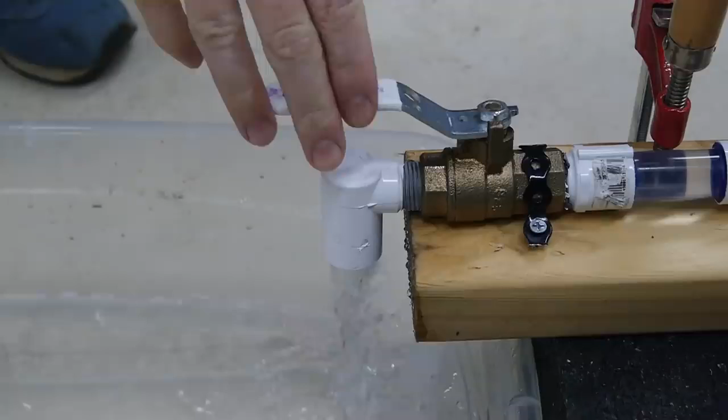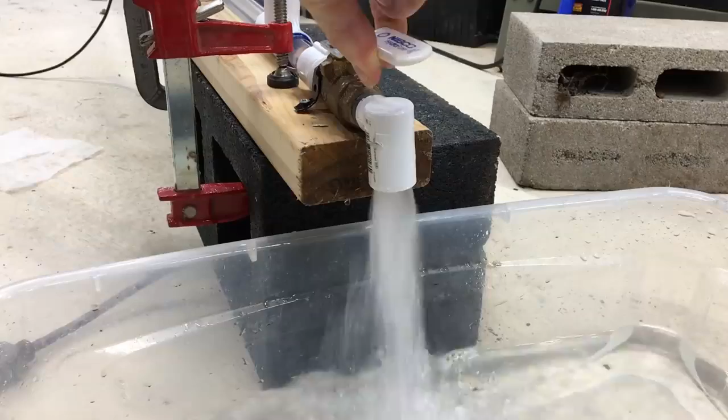It's easy to forget how heavy water is since we hardly ever carry more than a few ounces at a time. But if you add up all the water in the pipelines of your city, or even just the pipes in your house, it makes up quite a bit of mass. And when all that water is moving through a pipe, it has quite a bit of momentum. If you suddenly stop that movement, for example by quickly closing a valve, all that momentum has nowhere to go.

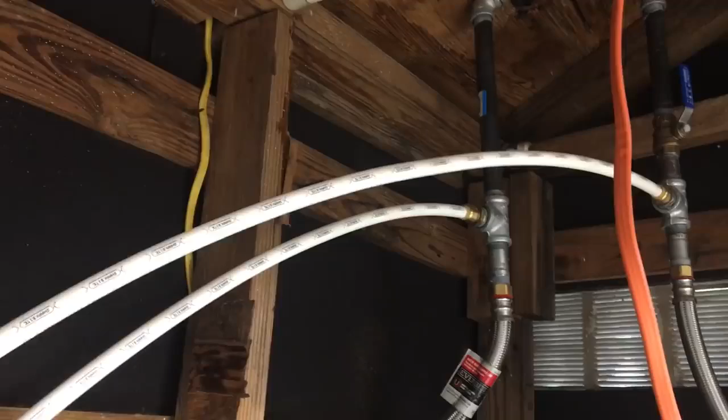Since water isn't compressible or springy, it can't soften the blow. You might as well be slamming concrete into the back of the valve and the walls of your pipe. Instead of being absorbed, that sudden change in momentum creates a spike in pressure that travels as a shockwave through the pipe. Sometimes you'll even hear this shockwave as banging in your walls when you close a faucet or run the washing machine, hence the superhero-esque nickname, water hammer.

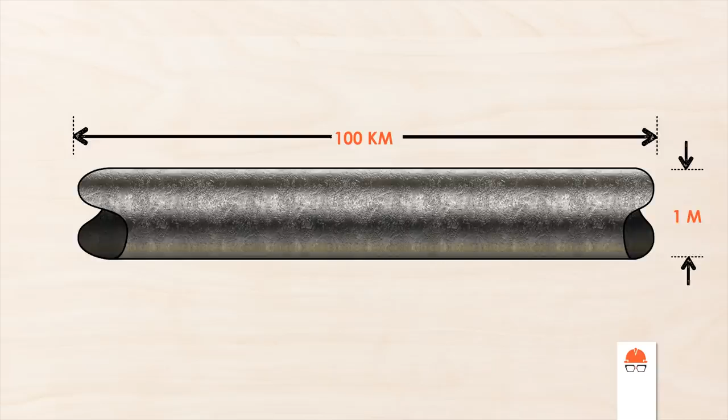Banging pipes inside your walls can sound a bit spooky, but for large diameter pipelines that can be hundreds of kilometers long, that surge in pressure from a change in momentum can cause major damage. Let's do a quick calculation. If you have a pipeline carrying water that is 1 meter in diameter and runs for 100 kilometers, a fairly average sized pipeline, the mass of water in the pipe is about 80 million kilograms. That's a lot of kilograms. In fact, it's the equivalent of about 10 freight trains.

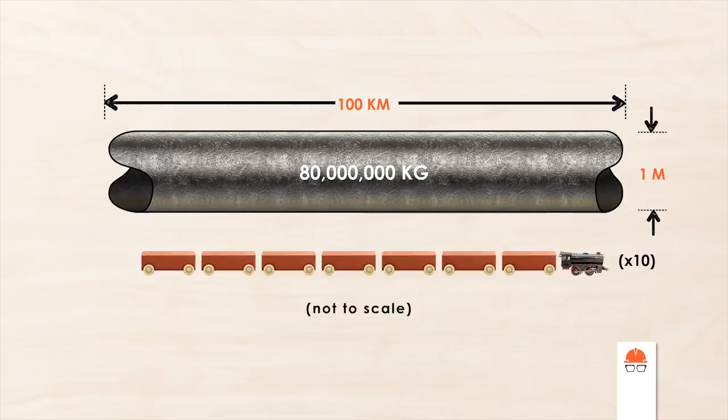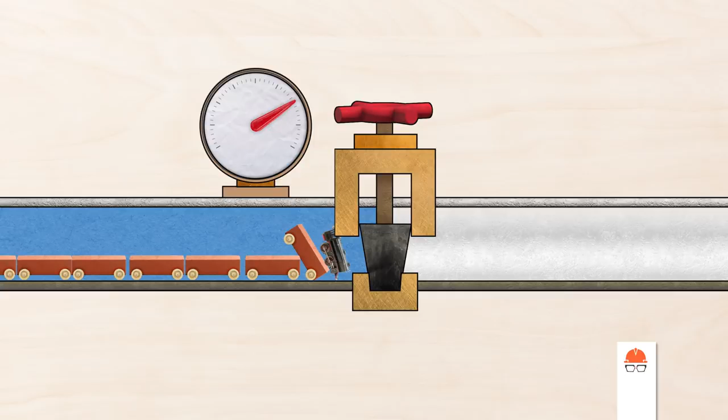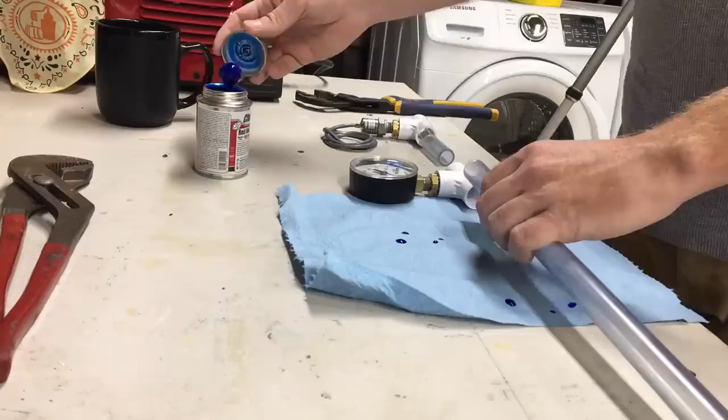Imagine you're an operator at the end of this pipeline in charge of closing a valve. If you close it quickly, you've essentially slammed those trains into a brick wall, and the pressure spike that results from such a sudden change in momentum can rupture the pipe or cause serious damage to other parts of the system. There's actually another term for when a large spike in pressure ruptures a sealed container, a bomb. And water hammer can be equally as dangerous. So how do engineers design pipe systems to avoid this condition? Let's build a model pipeline and find out.

Here's my setup. I've got about 100 feet or 30 meters of PVC pipe connected to the water on one end and a valve on the other. I also have an analog and digital gauge so we can see how the pressure changes, and a clear section of pipe in case anything exciting happens in there. I mean civil engineering exciting, not like actual exciting.

Watch what happens when I close this valve. It doesn't look like much from the outside, but look at the data from the pressure gauge. The pressure spikes to over 2,000 kilopascals, or about 300 psi. That's 5 times the static water pressure. It's not enough to break the pipe, but way more than enough to break this pressure gauge.

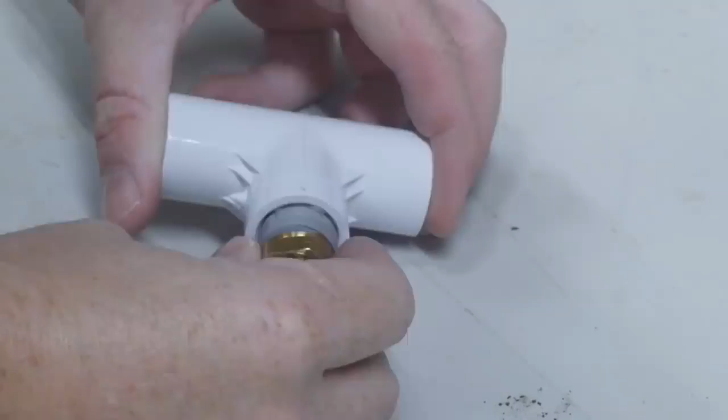We're not going to do any calculus here, but the terms of this equation show the parameters that can be adjusted to dial back these damaging forces. And the first one is obvious. It's the speed at which the fluid is moving through the pipe. Reducing this is one of the simplest ways to reduce the effect of water hammer.

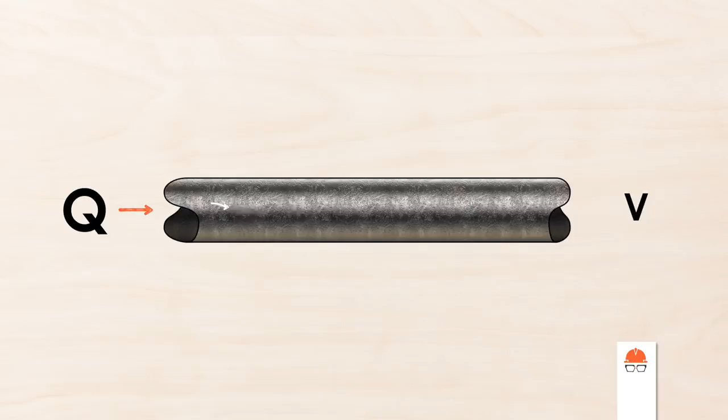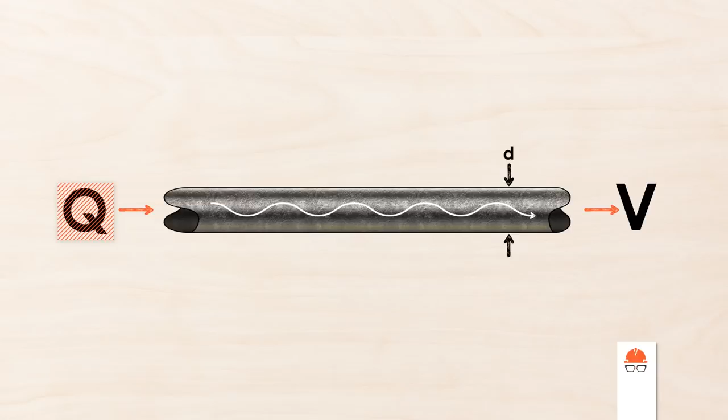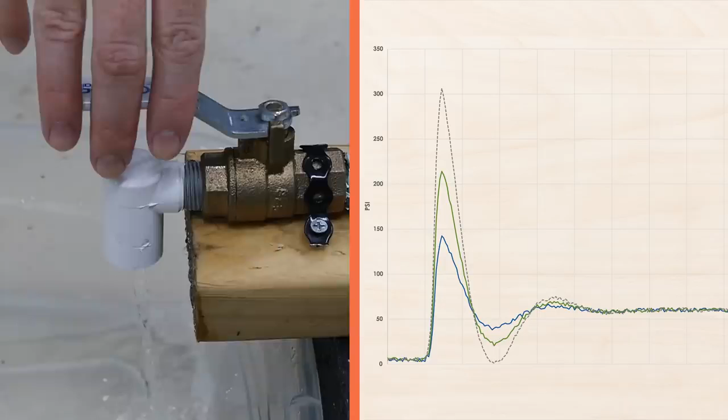Velocity is a function of the flow rate and the size of the pipe. If you're designing a pipeline, the flow rate might be fixed so you can increase the size of your pipe to reduce the velocity. A smaller pipe may be less expensive, but the flow velocity will be higher, which may cause issues with water hammer. In this case, my pipe size is fixed, but I can reduce the flow rate to limit the velocity. Each time I reduce the velocity and close the valve, the resulting spike in pressure decreases.

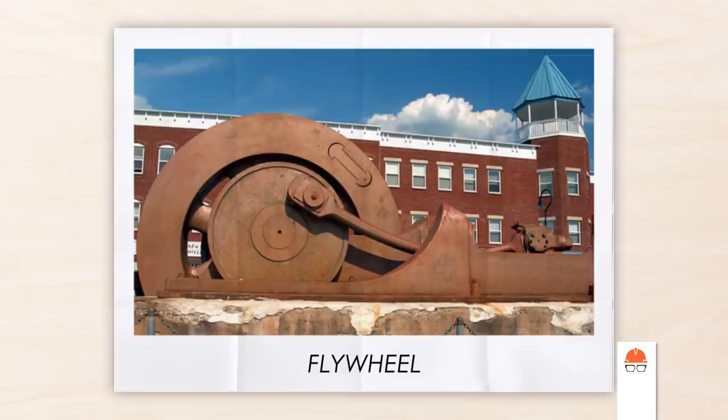Next, you can increase the time over which the change in momentum occurs. One common example of this is adding flywheels to pumps so they spin down more slowly rather than stopping suddenly. Another example is just to close valves more slowly. If I gently shut the valve rather than allowing it to snap shut, the pressure changes are more subtle.

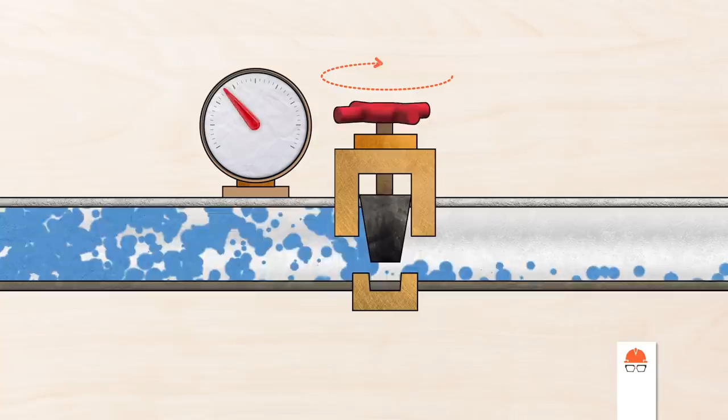On large pipelines, engineers not only design the components, but develop the requirements for operation of the equipment. This will almost always include rules for how quickly valves can be opened or closed to avoid issues with water hammer.

The final parameter we can adjust is the speed of sound through the fluid, also known as wave celerity. This describes how quickly a pressure wave can propagate through the pipe. The wave celerity is an indirect measure of the elasticity of the system, and it can depend on compressibility of the fluid, the material of the pipe, and whether or not it's buried in the ground. In a very rigid system, pressure waves can reflect easily without much attenuation.

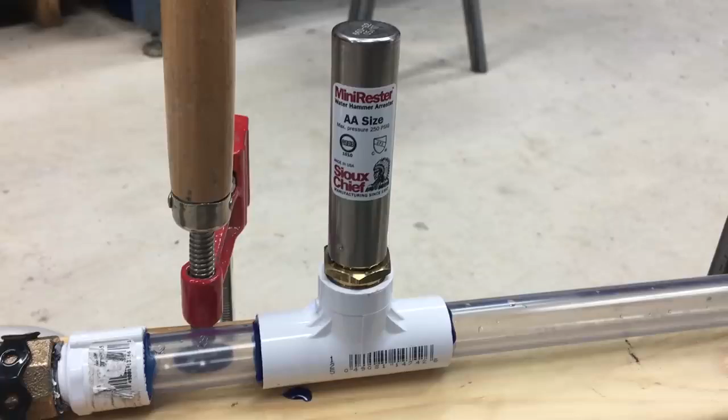I've got flexible PVC pipe sitting on the ground free to move, which is already helping reduce the magnitude of the water hammer. I can increase the flexibility even more by adding an anti-surge device. This has an air bladder that can absorb some of the shock and reduce the pressure spike even further. Anti-surge devices are very common in pipe systems, and they can be as simple as spring-loaded valves that open up if the pressure gets too high.

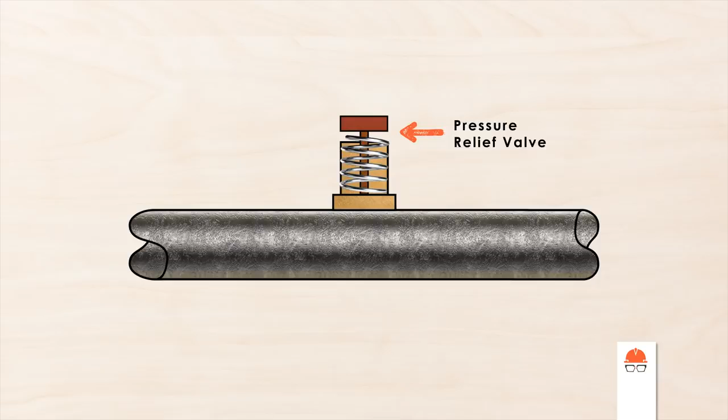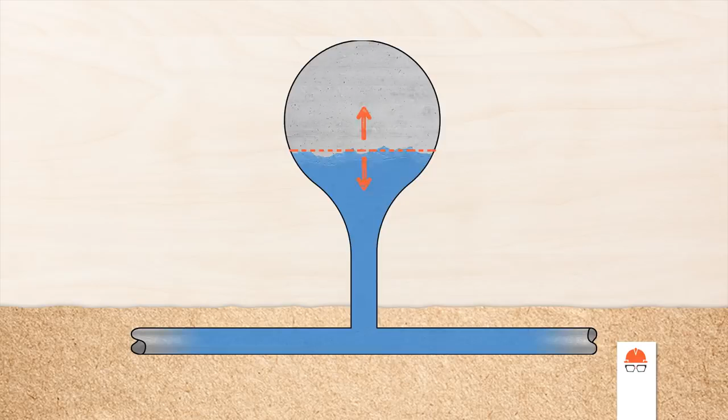In water distribution systems for urban areas, water towers help with surge control by allowing the free surface to move up and down, absorbing sudden changes in pressure. Plumbing is one of the under-acknowledged innovations that has made our modern society possible. But when you harness the power of water by putting it in pipes, it's easy to forget about that power altogether.

Water can be as hard as concrete when confined, and if you bang two hard things together, eventually something's gonna break. If you're an engineer, your job is to make sure it's not the expensive infrastructure you designed. Part of that means being able to predict surges in pressure due to water hammer, and design systems that can mitigate any potential damage that might result.